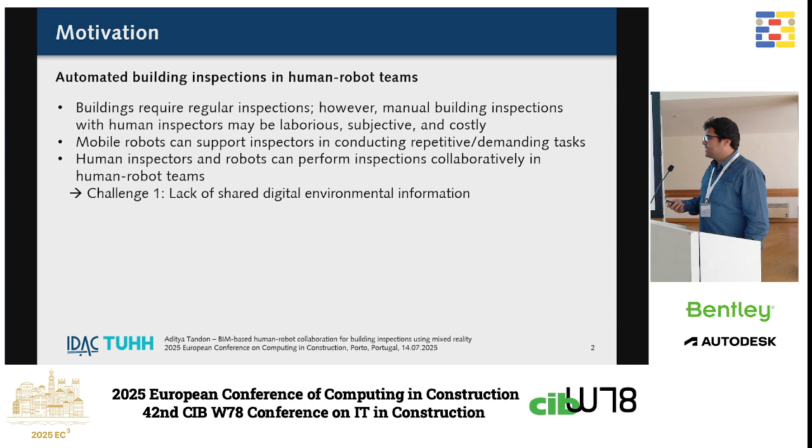However, there are a few challenges before these inspections can be performed collaboratively. Number one is that there is a lack of shared digital environmental information between what's perceived by the humans wearing the mixed reality headsets and the robots. The second challenge has to do with lack of intuitive interfaces for allowing control of the robots by human operators.

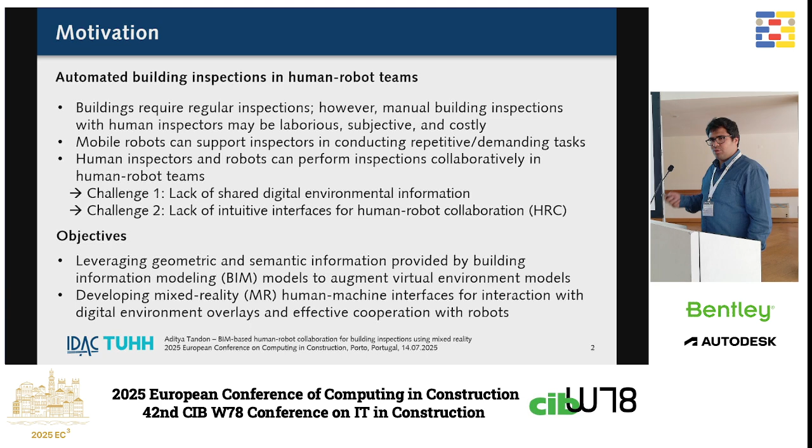Our objectives are to utilize geometric and semantic information that is present inside BIM models to actually augment the virtual environment models. And at the same time, we want to develop mixed reality-based human-machine interfaces that allow effective interaction between the robots and human inspectors, and also use this information that we extract from BIM models to create digital environment overlays on the actual inspection environment.

So we propose a framework that uses both building information modeling and mixed reality. And before we go into how the framework actually works, it's important to understand the different frames that are involved. We essentially have the BIM model frame B, which corresponds to the reality. And at the same time, we have a map frame M, which is where robots usually operate. And the third one, and the most important one, is actually the headset origin frame, which is also coincident with our virtual environment. So we have three major frames.

And what's really nice is that the frames are directly related to one another through a simple linear transformation, which can eventually be identified, allowing robots to work alongside humans with information from the BIM model. The actual frames between the robots and the map, and the robot and the mixed reality headset and the virtual world or the MR headset origin frame are actually given by the localization systems of both the robots and the mixed reality headsets.

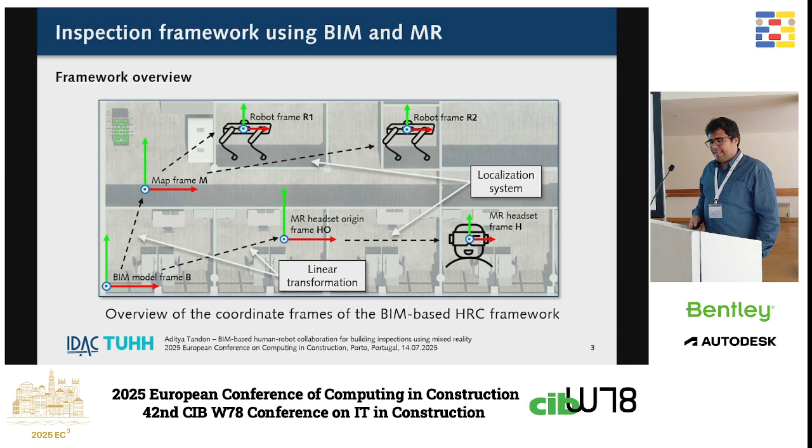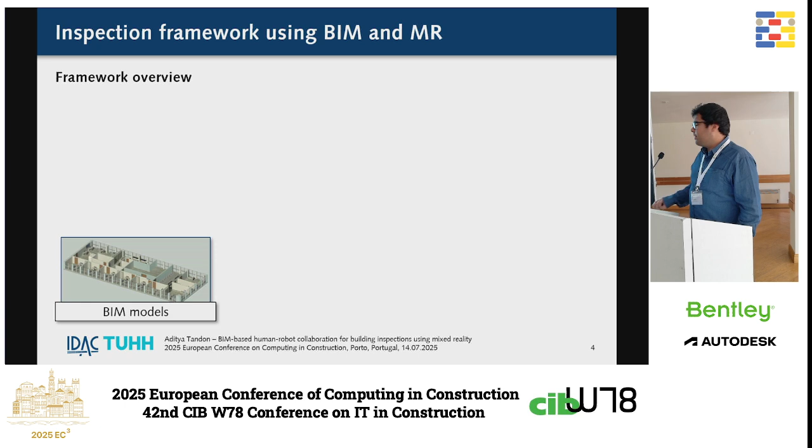So to go a little bit deeper into how this framework works together, we start off with BIM models and utilize all sorts of information about the geometry and semantic information that's there to enrich our virtual environments. So a virtual environment can then be created based on the BIM model, but what's interesting is that we must align both of these and find the fixed linear transformation between the two. That can be expressed with this transformation, B T HO, which is then a linear transform between the BIM model and the virtual environment. And the position of the MR headset in the virtual environment is already known through the internal localization system.

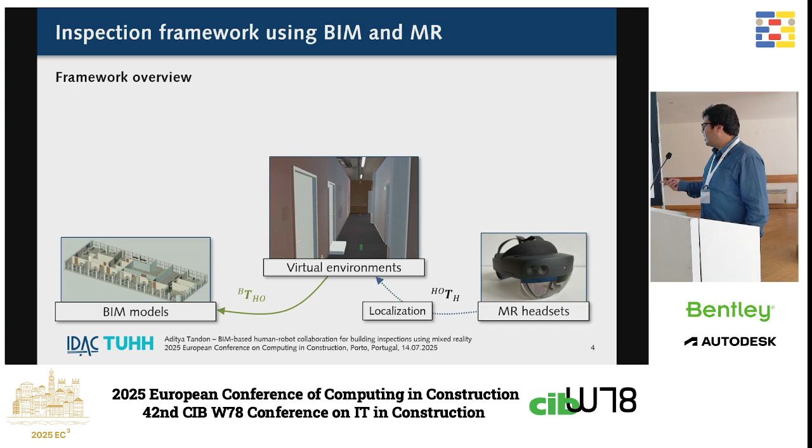When we want to utilize this with robots, what we actually have are robot navigation maps, and those are also known directly. So the position of the robots is known directly in the robot navigation maps through their own localization system. But somehow these navigation maps need to be tied in with the BIM models and the virtual environments. And one option is to directly relate the robot navigation maps to the BIM models using fiducials. But what could also be used as an alternative approach is to directly align the robot navigation maps with the virtual environment.

And the advantage of doing that is that when we figure out this transformation HO to the map, we can directly calculate the position of the robots within the virtual environment, allowing us to not only give information back to the virtual environment from the robot, but also to command the robot directly in the virtual environment frame. This leads to three interesting transformations: the one aligning the BIM model with the virtual environment, the one with the robot navigation maps to the virtual environment, and ultimately the robots in the virtual environment directly.

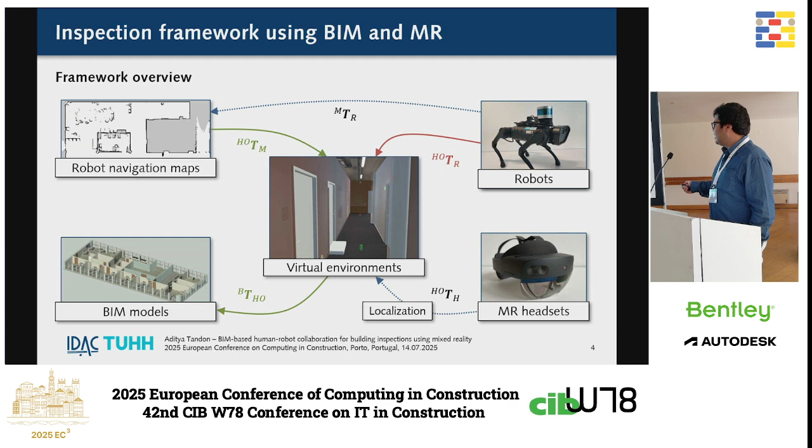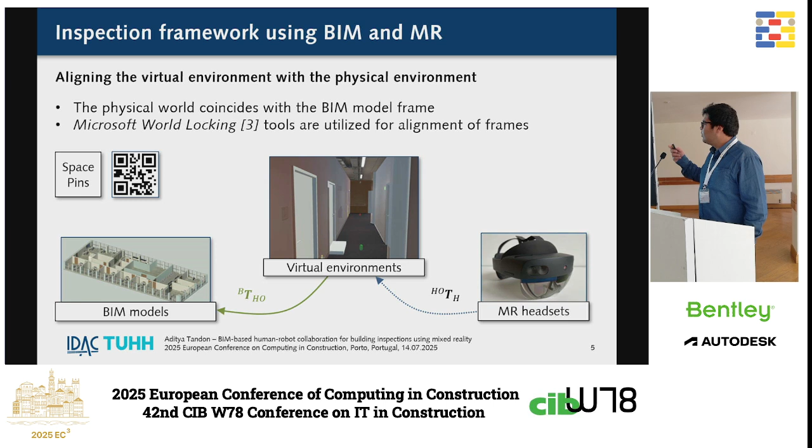To do the first part and figure out the transformation between the BIM model and the virtual environment, what we do is we can utilize a fixed marker. This is also known as space pins, which can then be added to the physical environment, which is also coincident with the BIM model, and can also be added to the virtual environment.

So if we are able to scan these space pins using the MR headsets, we can directly complete this transformation chain, allowing us to determine the linear transformation between the BIM model or the real world and the virtual environment. In this way, we can determine this critical transformation.

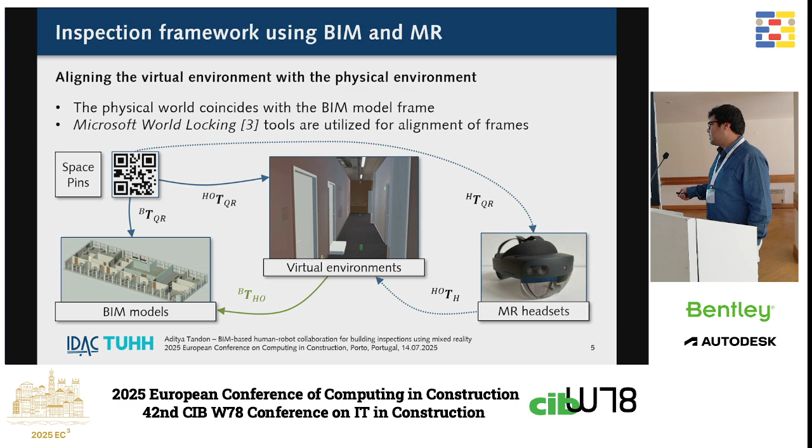The second step involves aligning the virtual environment with the robot navigation maps, which means determining this transformation as well. A similar approach can be utilized since we already know where the robots are in the navigation map through the localization system. And we already have the position of the MR headsets in the virtual environment through the internal localization system of the mixed reality headset.

What we can do is actually add these space pins on our robot, and then also scan these space pins directly from the mixed reality headset, allowing us, when we close the transformation chain, to determine this green transformation and also this red transformation.

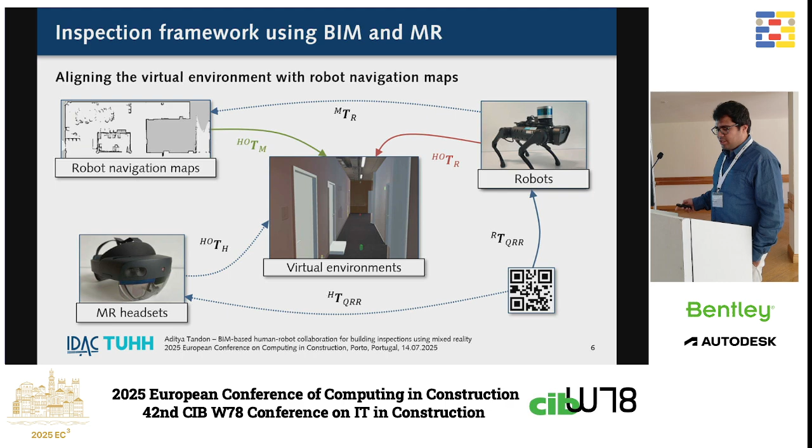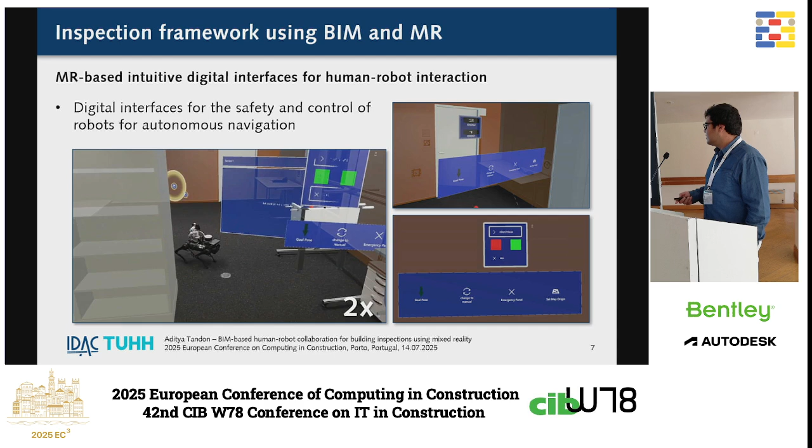Additionally, what we do in our framework is we develop intuitive digital interfaces for allowing humans and robots to interact with one another. Specifically in this case, you can see that a human operator can ask the robot to navigate to a custom navigation waypoint after the worlds have all been aligned together. So as you see here, the robot navigates to this specific navigation waypoint.

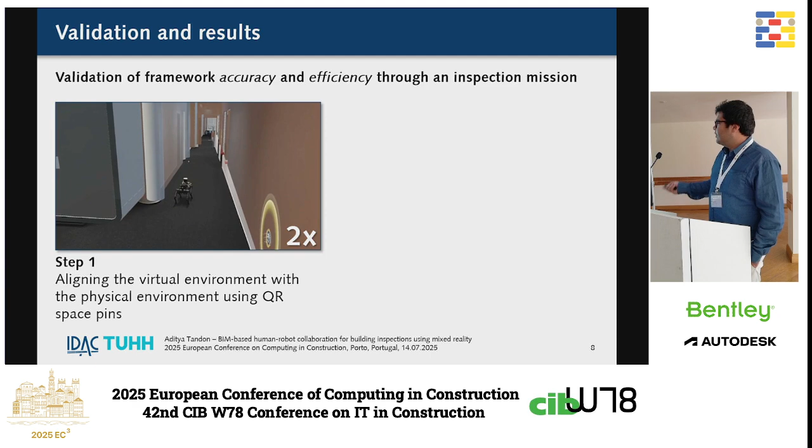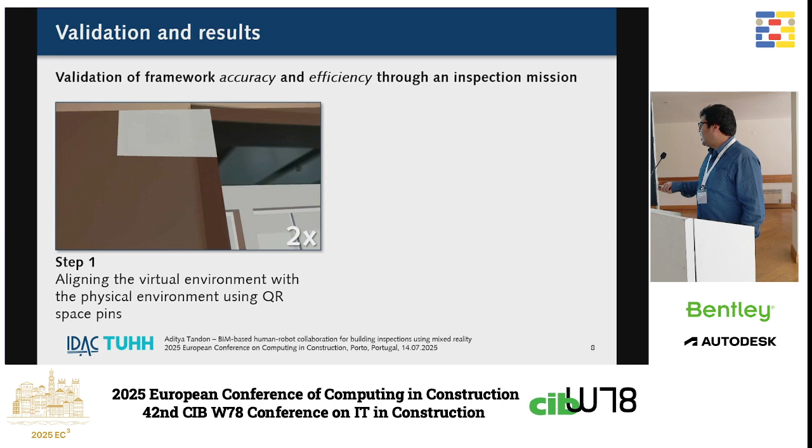We then validate our framework by testing the accuracy and efficiency. As step one, we align the virtual environment with the physical environment using these QR space pins. And when these space pins are then aligned, you can see that we get a good transformation. A red marker is created at the base, which signifies that the alignment is complete.

And the second step, to align the virtual environment with the robot navigation maps, we calculate the transformation and then can get the robot to move to the actual position, which is then signified by this red marker that's been laid in the real world.

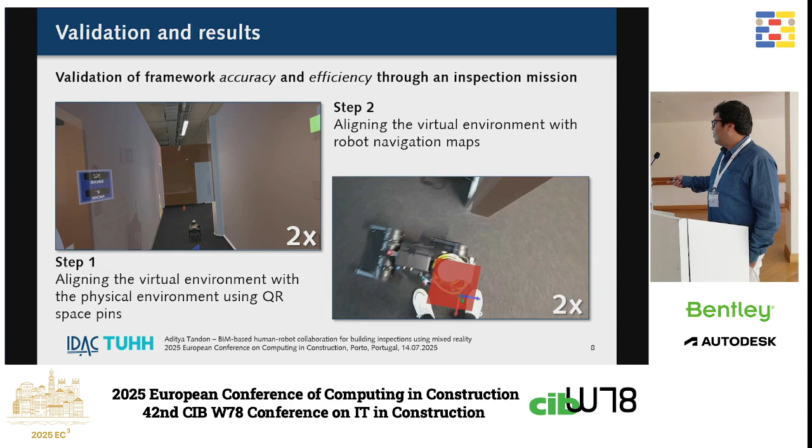Once these two steps are complete, we know that the virtual environment has been aligned with the physical environment, and we also know that the navigation maps for the robots have also been aligned to the virtual environment, allowing us to validate the overall framework by performing an inspection mission. So as you see, we can directly select a BIM element and say this BIM element needs to be inspected, and a command can then be given to the robot to navigate to that BIM element.

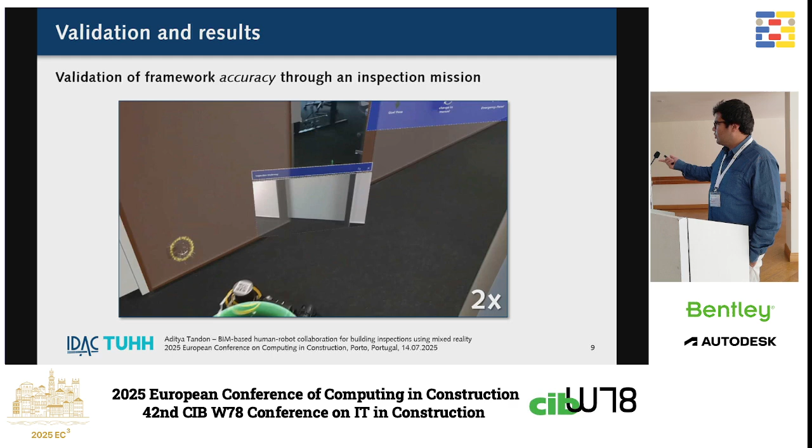Out here, the green position is actually the inspection pose marker, and all of the elements that you see with the yellow points are actually game objects that have been created in the Unity world to allow this sort of task execution to take place.

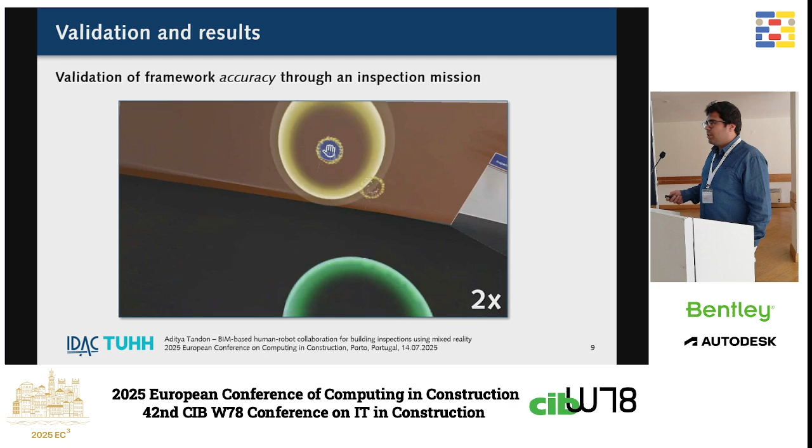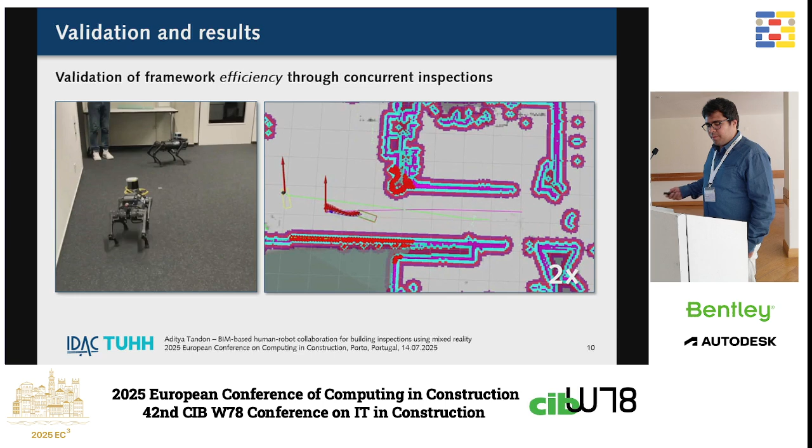Lastly, we also try to look at the efficiency of the framework by doing concurrent inspections, which means you don't utilize only one human and one robot, but we can actually utilize multiple robots to perform these inspections alongside the humans. So as a last step, we can see that there are certain tasks that are better performed by humans, which may be out of reach for the robot. And in this method, we can allocate tasks based on capabilities of humans and robots both to perform these inspections in a more effective and concurrent manner.

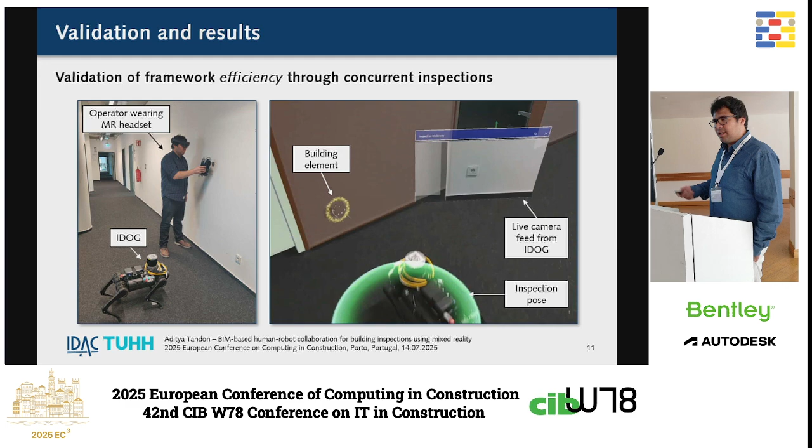While all of this sounds really nice, there are definitely a lot of challenges. Number one being scalability; lighting and connectivity play major roles that inhibit this from real-world deployment. And practical barriers also include the high implementation costs, the training needs, and obviously safety compliance to ensure that human-robot collaboration is safe. And in future work, we look at exactly this and how we can integrate more safety mechanisms to ensure secure human-robot collaboration.

And at the same time, how we can improve the localization accuracy of the robots and the human workers wearing the headset by introducing a fixed constraint between the headset and the robots directly.